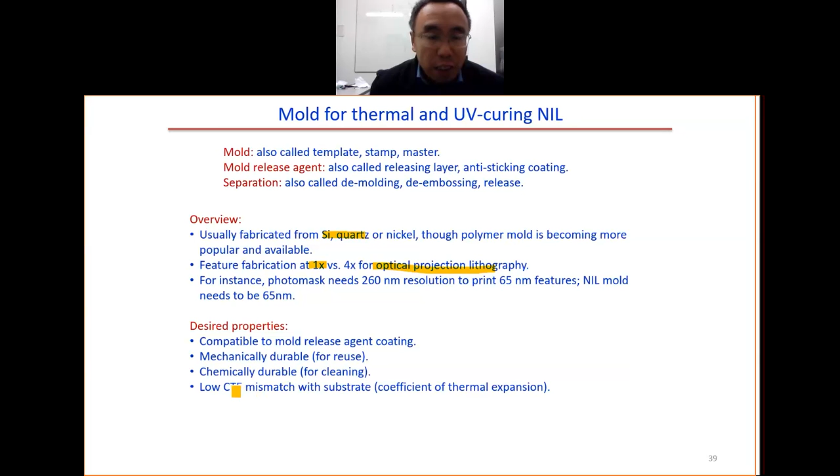So the properties we need for the mold: first, compatible with the mold release agent coating. This one is actually very critical because many materials, even though they have good mechanical or chemical properties, are not compatible with the mold release agent coating. Then we need mechanically durable, chemically durable, and low coefficient of thermal expansion mismatch.

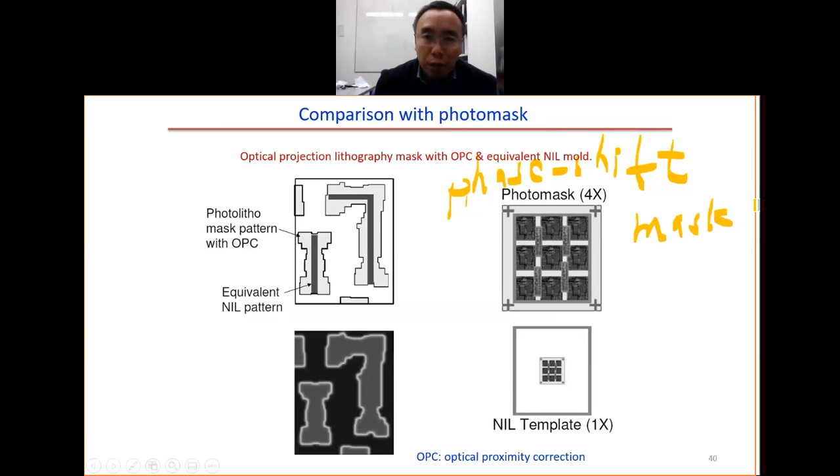As we can see here, for optical lithography, because of diffraction, we need to do many tricks to improve the resolution. Here we have optical proximity correction. Another thing we work on the most is the phase shift mask. So we also do the phase shift mask for optical lithography. For the imprint, we don't need optical proximity correction or phase shift mask. All we need is to make a mold with very high resolution patterning.

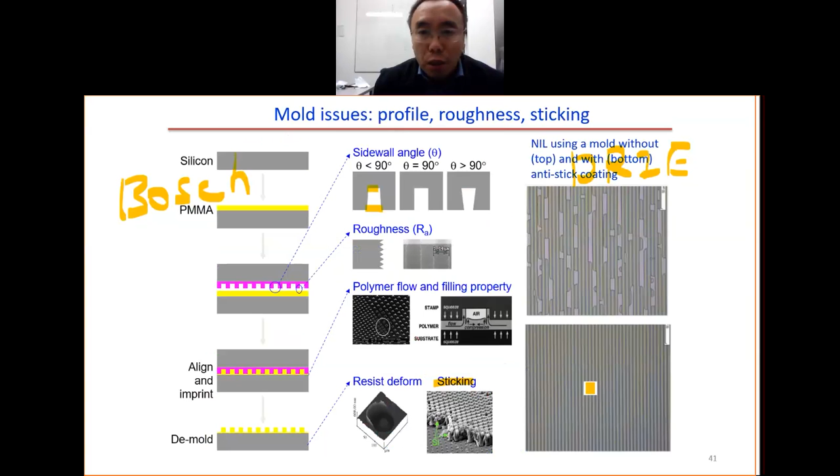So how to do this anti-sticking coating? Actually, this is the major secret of imprint lithography. In 1995, Professor Stephen Chou's group from University of Minnesota asked a student to spend about 1 year to find how to make the mold very low surface energy. But he wanted to keep the secret. When he published the paper in Science, he mentioned clearly that we do not need any mold release agent. But actually, this is wrong information. The only purpose is to mislead people. As a result, other people could not duplicate the imprint for maybe 2 or 3 years. Then they realized you need some anti-sticking coating on the mold surface to make it actually work.

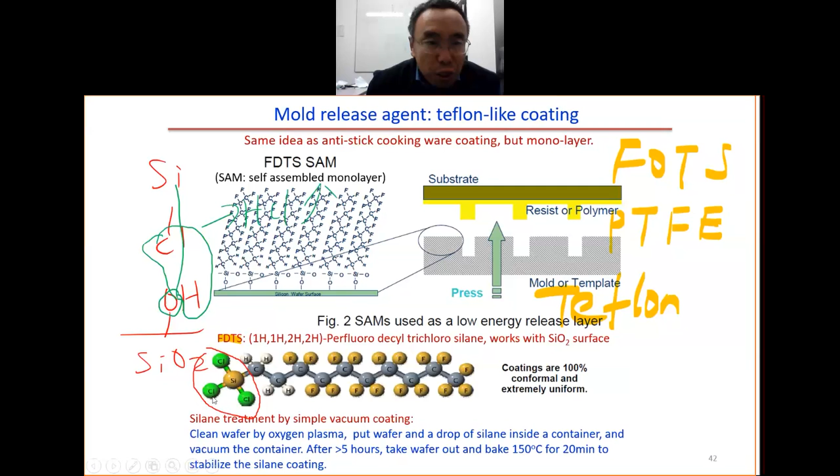But here you also see that you have the lateral bond, silicon-oxygen lateral bonding. So how to have this lateral bonding? This is because you have three chlorines, trichloro. So how does this thing work? It's like this. We have one silicon here, chlorine. You have another nearby one, silicon here, chlorine.

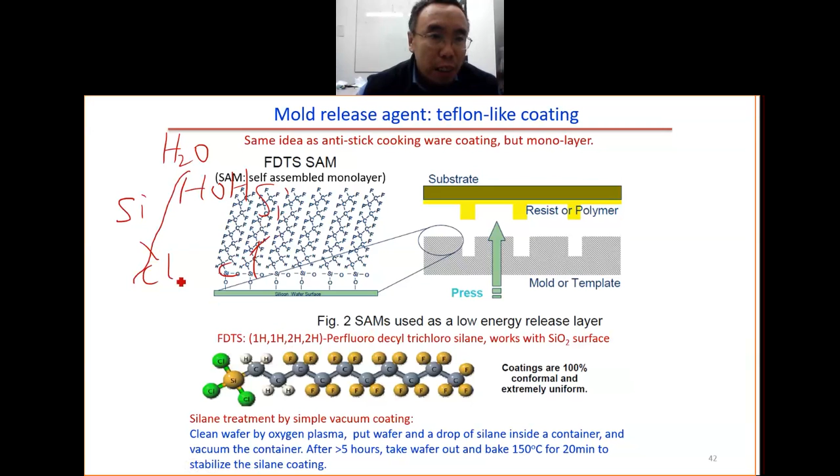In the environment, there is always water. Water, we know, is HOH. So effectively, this H will take away this chlorine to form HCl. This H will take away this chlorine to form another HCl. So in the end, you leave behind this oxygen here, and you have this silicon-oxygen-silicon that you can see here. So effectively, you form two HCl molecules to take away the chlorine. Then you have the oxygen bond.

So normally you clean the wafer. Then you put a drop of the silane. This silane is a liquid. You put a tiny drop, maybe a microliter, inside the container and pump vacuum on the container. After several hours, you take it out, you do the baking, you get a very good coating property, and you make the surface very hydrophobic.

Some of you may know we have this nanorobotics group at the University of Waterloo. The task for the nanorobotics group is to move micro objects as fast as possible and pass the barriers. When you want to move the nano or micro object very fast, you need the surface to have very low surface energy, very low friction force.

The people came to me, maybe this happened 7 years ago, and asked me how to make the surface very low friction. I told them to do this kind of process. Later on, they won the first prize in the nanorobotics competition in the world. This is the most important secret for nanoimprint lithography. But nowadays, everybody who works on nanoimprint knows about this coating to make the surface very low surface energy.

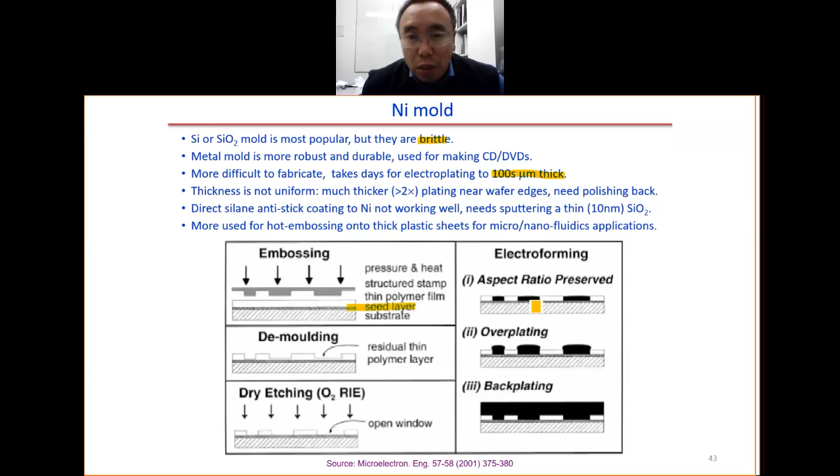Then you do the electroplating, you overplate to build up the backbone, which is hundreds of micrometers thick. This takes a day or maybe even longer to do the plating process.

Another problem is that the edge plates faster than the central part. You can imagine when more ions come to the wafer edge than to the wafer center, the growth there will be faster than the growth at the wafer center. So you need a polish-back process.

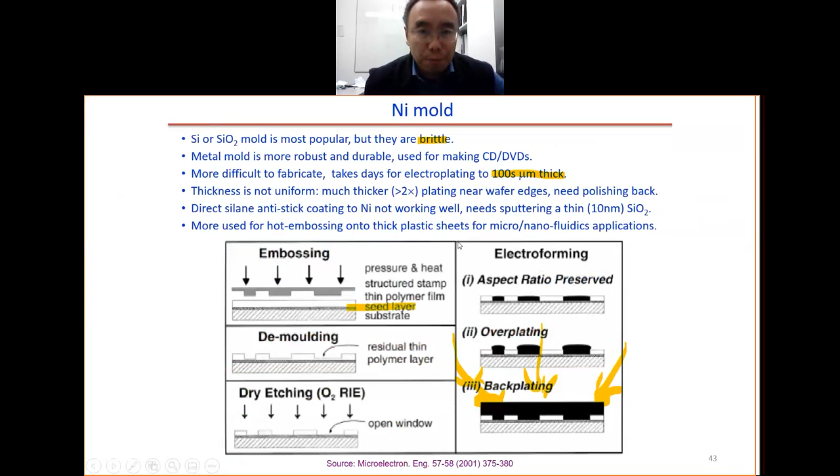Another problem is that nickel is not very good for anti-sticking coating. So what you can do is coat a layer of silicon dioxide, then you can process it to make the surface low surface energy. And this is the nickel mold.

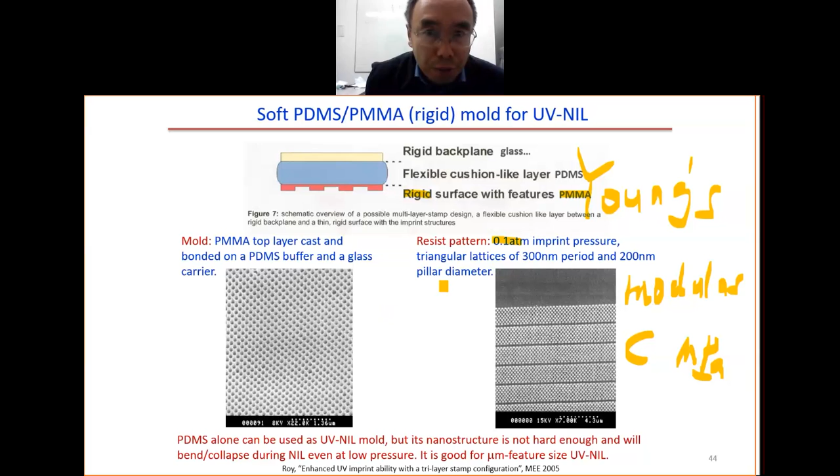...the PMMA is not compatible with this process. You cannot make the surface low surface energy. As a result, maybe after one or two imprints, the mold will have lots of peel off. This one in that is not good, only good for maybe one or two time imprints, then there will be a peeling off problem because this one cannot be made low surface energy.

This one is good. You can have this anti-adhesion layer give you low surface energy. This one, the backbone is the PDMS, a soft plastic. Because it is plastic, you can do the imprint onto a curved surface. You can see here, you do the imprint on the optical fiber because the PDMS is flexible.

It's very, very flexible, soft. So how do you make this mold? First you coat the coupling agent and coat the imprint resist. This is the PDMS. You coat the coupling agent because the resist has low surface energy; with the coupling agent you get better adhesion of the resist onto the PDMS substrate.

Then you do the UV imprint. This layer here is the UV resist, the UV curable resist. You do the UV imprint, they separate, and you get the mold. So you can see, it's not difficult to copy the mold from this master mold onto this polymer mold.

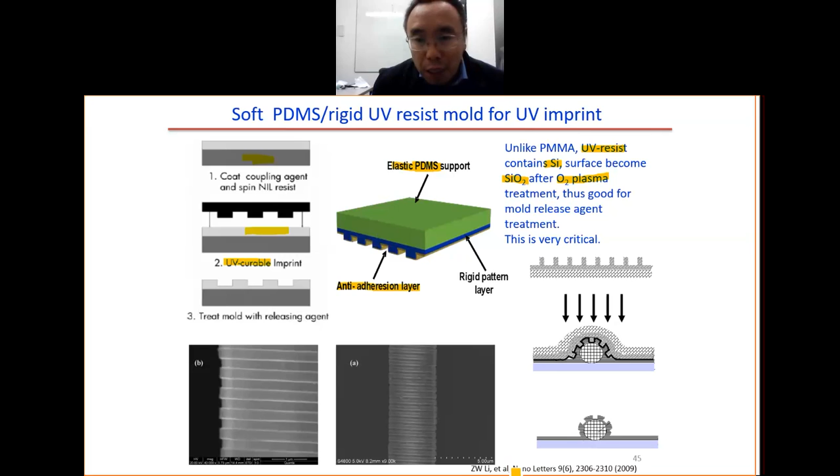So here the mold material, this one is the UV curing resist. We know that the UV resist contains silicon, lots of silicon inside. If we do oxygen plasma treatment, the surface becomes silicon oxide. When the surface becomes silicon oxide, you can process it to make it low surface energy for imprint. That's why this is a very good mold, published in Nano Letters, a very good journal.

So this is the fluoropolymer mold. We know that saving the master mold is very difficult and expensive to make. So to save the master mold, we can copy it into a polymer mold, then use the polymer mold to do the imprint. The good polymer is the fluorocarbon polymer, good because it has very low surface energy, for easy separation.

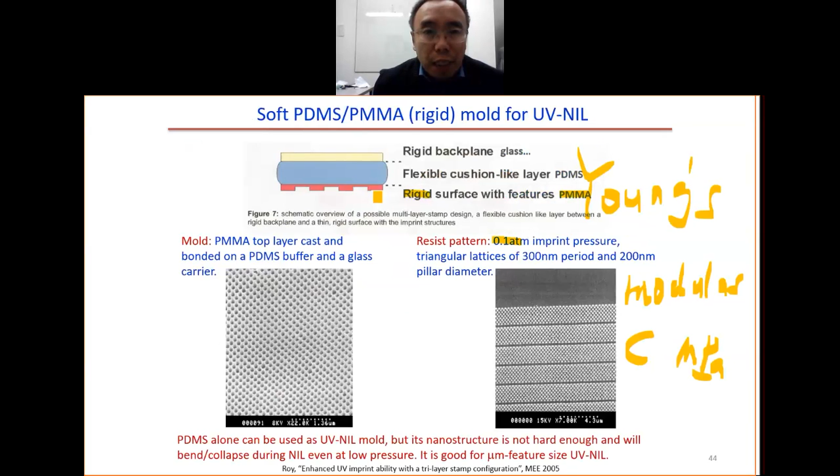So ideally, we want the mold to have low surface energy, then we don't need this self-assembled monolayer. This way we can use the mold hundreds or even thousands of times. So this is the idea: we have the mold in fluoropolymer. It is fluoropolymer, so this gives you low surface energy.

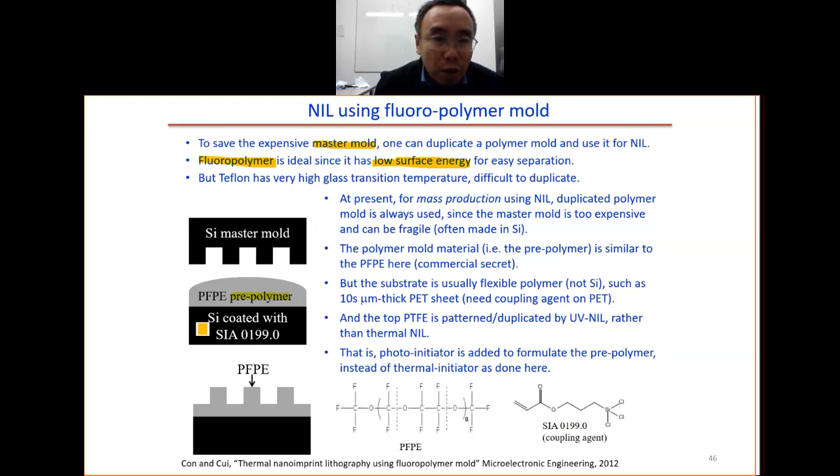We need this coupling agent. With this coupling agent, adhesion of the pre-polymer to the substrate will be better. Then you press the mold onto it, then do a thermal process, annealing at high temperature, and it becomes annealed and solidified. Then you get the mold.

But this is what was published in this work. So at the present, I learned recently that at the present, actually for mass production...

using imprint, this kind of polymer is actually used for the polymer mold, but this kind of thing is not published. People don't publish so much. But I will talk to people from the company, they can tell you this kind of information.

But the substrate here, in this work, is silicon. For mass production, we don't want silicon. So instead it is a PET sheet, a 10 micrometer PET sheet, rather than the fragile silicon.

Another difference is that this layer here, in this case, is cured by high temperature. But for production of the polymer mold from the master mold, it is cured by UV imprint lithography, not by thermal lithography. That means the photoinitiator is added to this material rather than a thermal initiator.

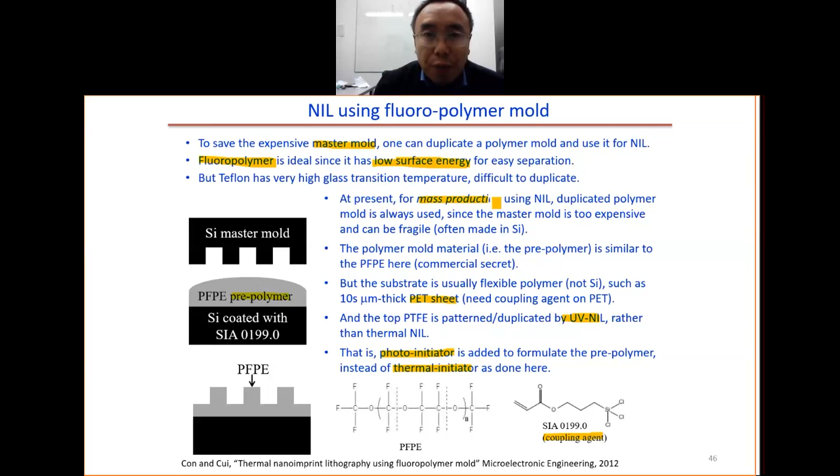So for this work here, we added the thermal initiator into this material. But for the UV imprint to copy the mold, we use the photoinitiator mixed with this material. Then you can cure the mold by UV light. Again, this is for mass production, a very, very important process.

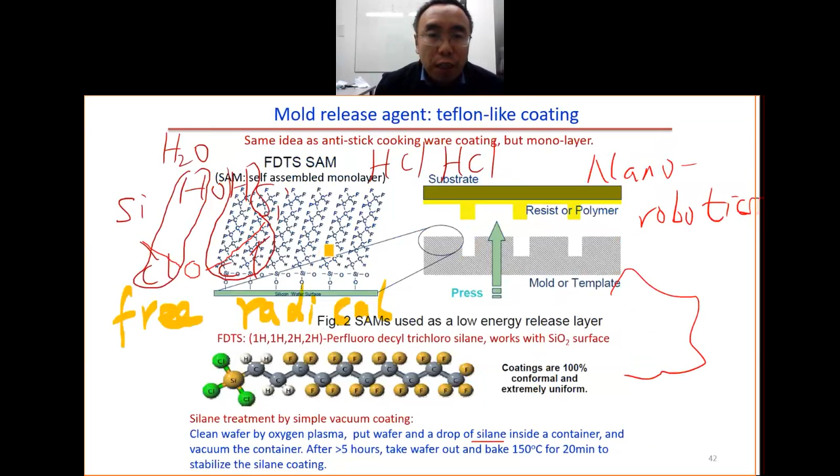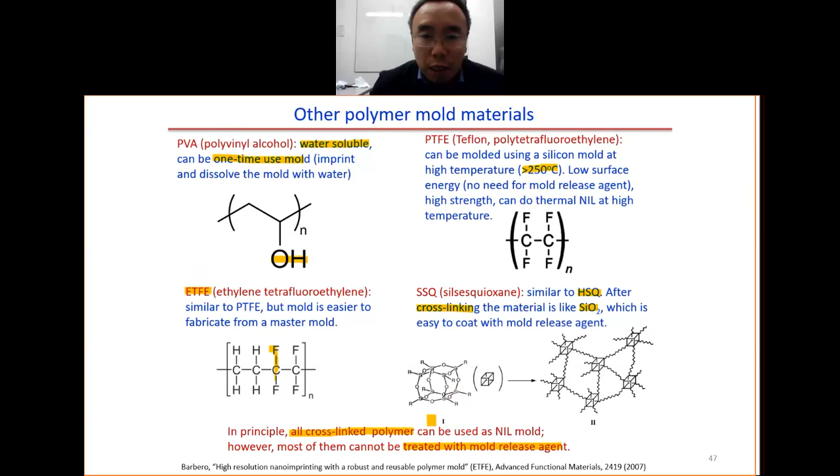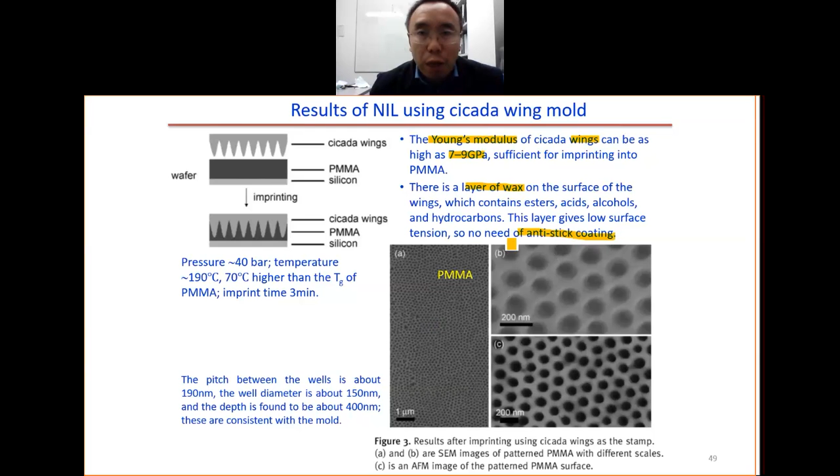More importantly, there is a layer of wax on the wing, and the wax has low surface energy, so it's easy for separation. That means the wing naturally has an anti-sticking property. So we have anti-sticking and low surface energy combined with the structure, giving super hydrophobicity, so water will fall off. This is good for the fly.

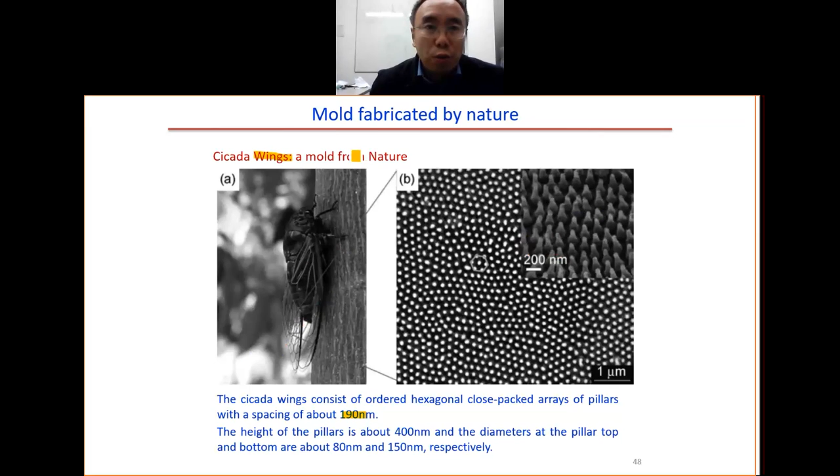Now let's look at alignment for imprint lithography. There is a big challenge for alignment in imprint lithography because first, we have a smaller error budget.

For the case of imprint, we have a 1 times error. That means if the misalignment is 10 nanometers, you get an error of 10 nanometers. But for optical lithography, you have 4 times reduction, so if the misalignment is 10 nanometers, it becomes 2.5 nanometers.

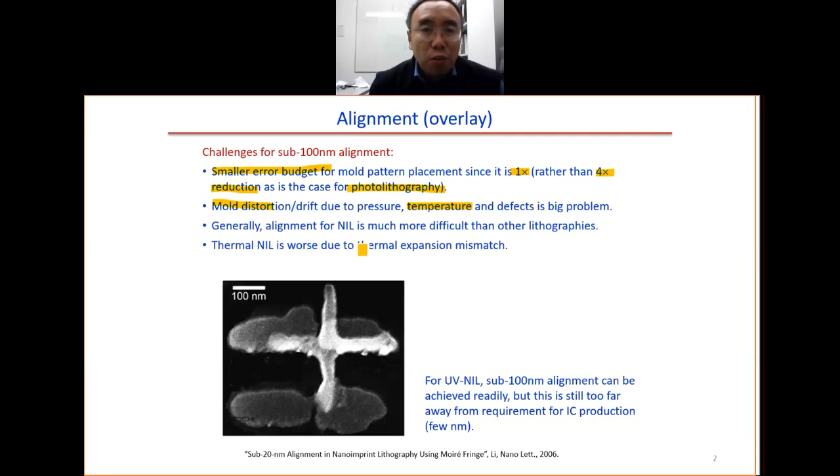The big problem for imprint is mold distortion and drift, because you need high pressure, and it's very hard to avoid drift, which damages the alignment. Also, temperature causes thermal expansion mismatch. For thermal imprint, it's very difficult because of this mismatch. For UV imprint, it's easier, but still very difficult because of the high pressure.

As a result, normally when we do imprint, we do not do alignment. We just do one layer, and it's done for the device. But in principle, you can do alignment, it's just not as easy.

In one example, we got 20 nanometer alignment by doing imprint, but in reality this is not so reliable. Sometimes if you have very bad luck, you don't get good alignment. So how do we do the alignment?

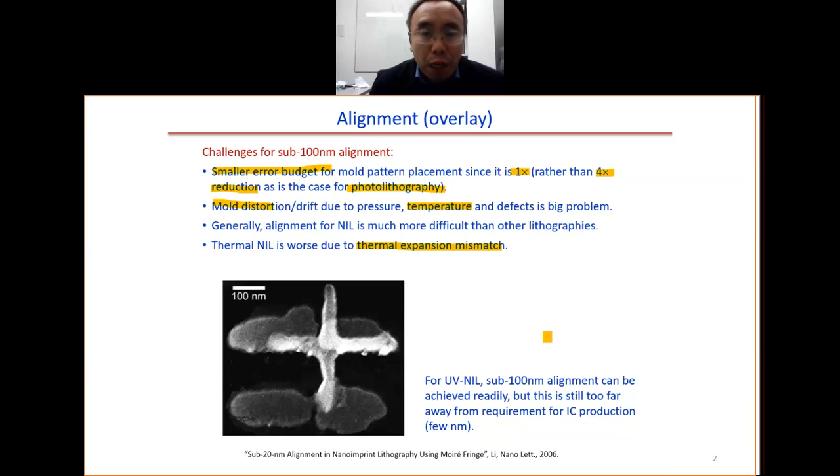One method, normally used in optical lithography, is called cross alignment. For this cross alignment, you have an alignment mark on the mold, and you put the complementary pattern - a square here, and the fourth square here with the other pattern. Then you measure them to get the alignment. This gives about half micrometer alignment accuracy, which is not good for nanoimprint.

For nanoimprint, we want alignment accuracy on the order of 100 nanometers. One way is to use gratings - you put a grating on the mold and a grating on the wafer with the same pitch, shine light, and do detection by transmitting light. We measure the zero order diffraction. When they are aligned like this, you get the maximum signal.

We can also do first order alignment. With first order diffraction, laser light comes in and you get one diffraction to the left, one to the right. You measure the difference between them. When they are symmetric, meaning well aligned, you get the minimum signal, ideally zero. That's one way to do alignment using gratings - the relative position of the two gratings tells you the misalignment.

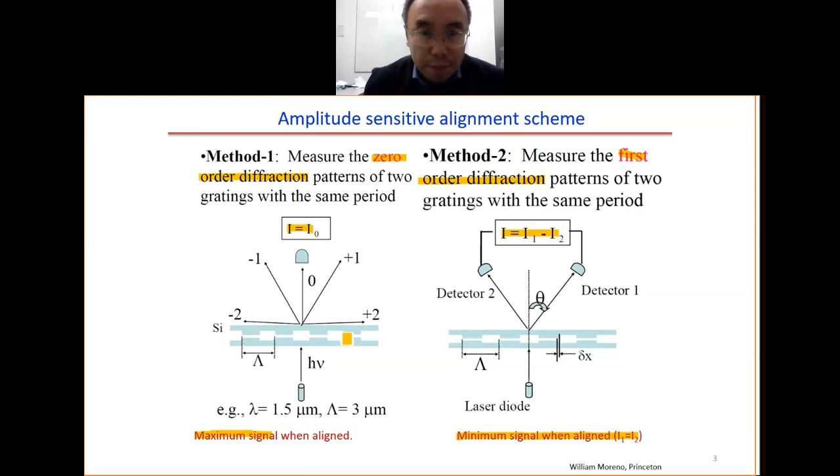Another method is called the Moiré pattern. This uses two periodic structures. When they are misaligned, you see a larger feature set appear - this is the Moiré pattern. We'll look at this more later. The strategy is to first do coarse alignment using the optical lithography method, then do fine alignment using this Moiré pattern.

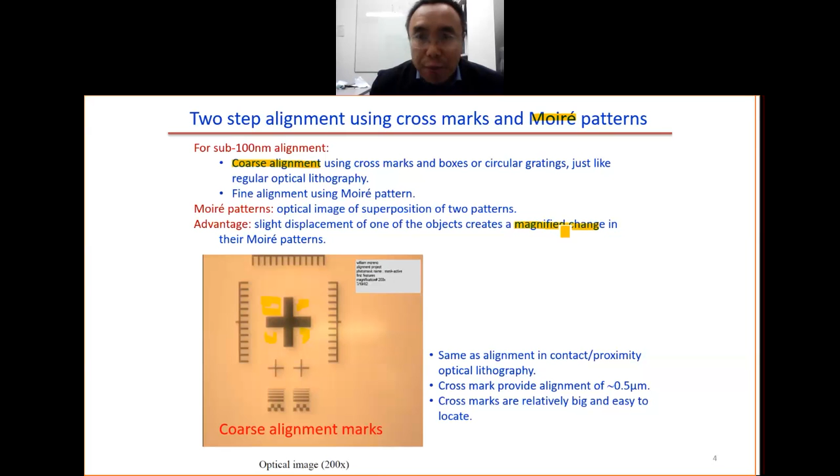Here is one example. You have this concentric ring with the pitch P1. You have the same thing, with the same pitch, also P1. You put them together. This one is aligned. When they are aligned, you see this pattern. When they are misaligned, you see something like that. So with a small misalignment, you can see this thing will show up. Effectively, the misalignment is magnified by this Moiré pattern.

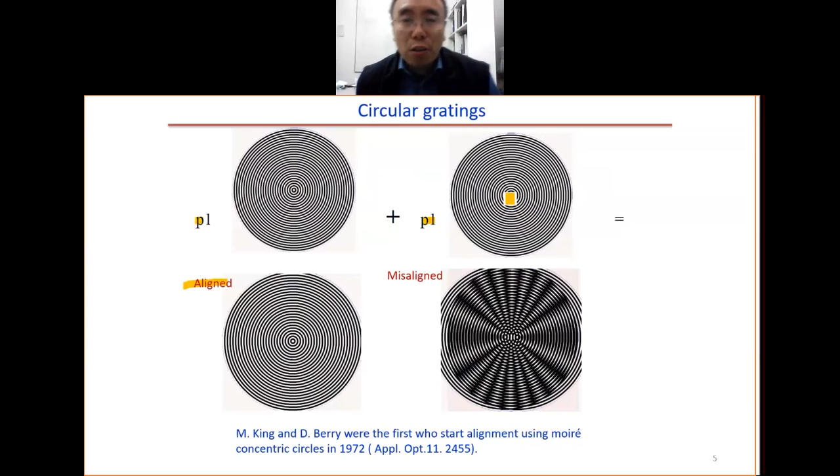If you look at the pattern here from a different angle, you see something like a wheel rotating. This is because the screen has pixels, so the pixels can also form a Moiré pattern with this periodic ring structure.

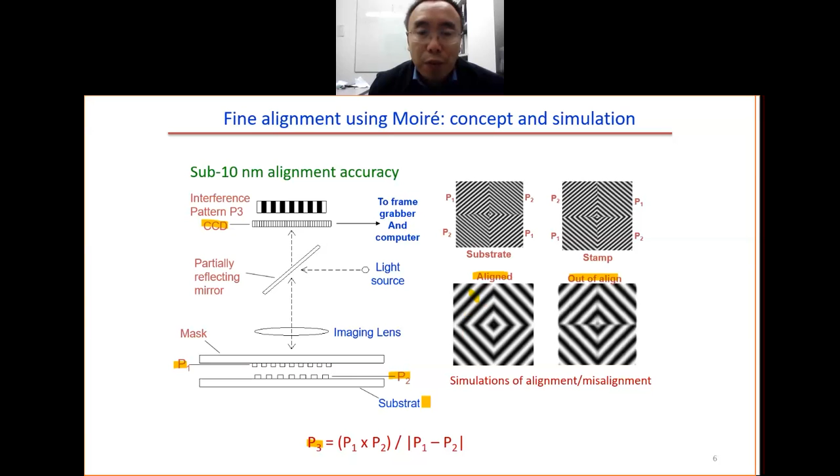So here is another design. This is the pattern on the mask, and this is the pattern on the substrate. You flip the mold over, so P2 will come to P1, and P1 will overlap with P2. Then you get something like this. When they are aligned, you see something like this. When they are not aligned, you see something like this.

Again, the pitch here, P3, is from here to here. This distance, P3, is given by this formula: P1 multiplied by P2 divided by P1 minus P2.

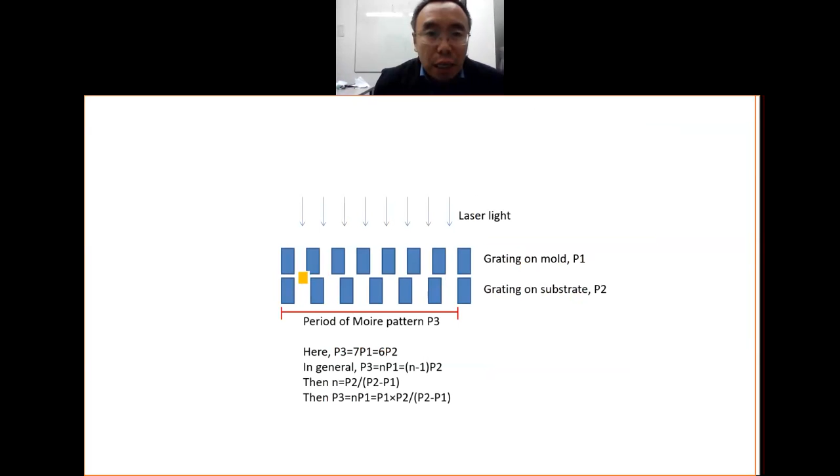Now let's look at how to derive this formula. Here we have the dark and the bright. Where is the dark? Where is the bright? In this case, we have a grating on the mold and a grating on the substrate. When you have this kind of alignment, the light can pass through, so this is the bright. When you have this kind of alignment, the light will be blocked, so this is the dark. This part corresponds to the dark, and this part corresponds to the bright.

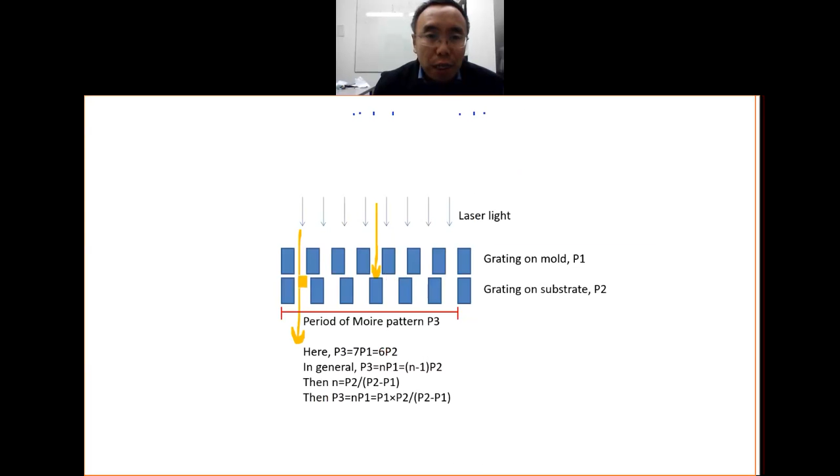So the pitch is from here to here. This is the P3. As you can see, in this case, P3 equals 7 times P1, which equals 6 times P2. We have 1, 2, 3, 4, 5, 6, 7. So we have 7 times P1 and 6 times P2.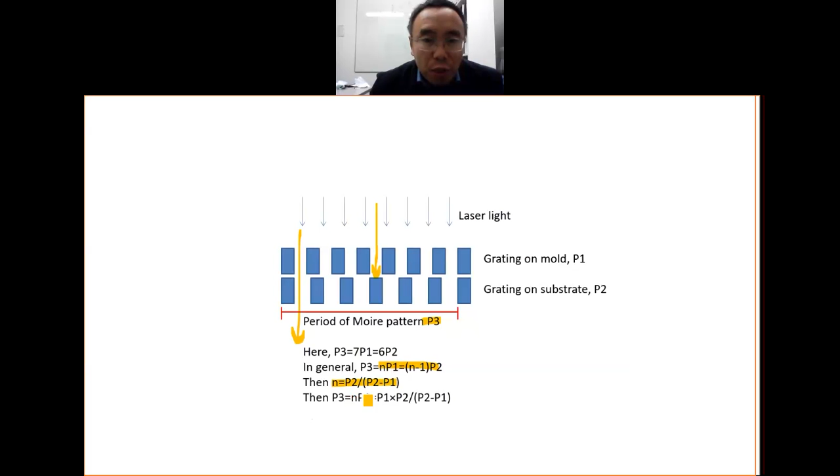In general, P3 is given by n times P1 and also n minus 1 times P2. From these two, we get n equal to this value. You put this n into here, so P3 equals nP1, and you get this. This is the formula you get, the same one as this one, and also the same as this one. So this is how you do the alignment.

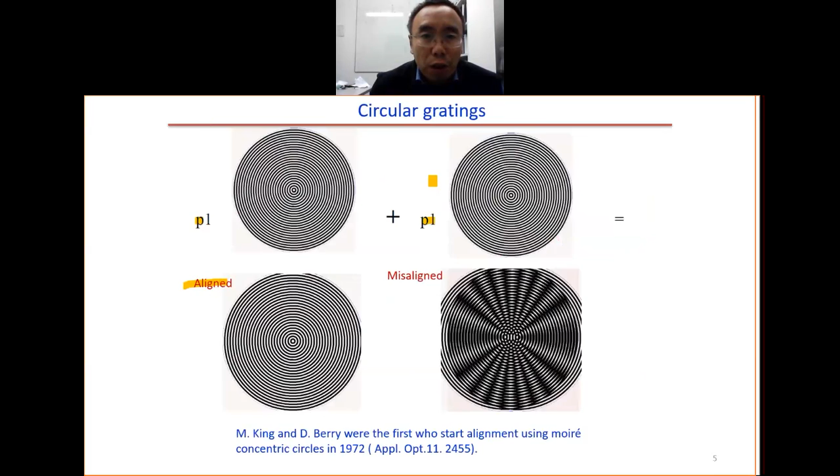Now I will show you a video for this Moiré pattern. It is a fun video. For the Moiré pattern, as I said, you have two periodic patterns that do not have the same period. When they overlap, you see a magnified pattern.

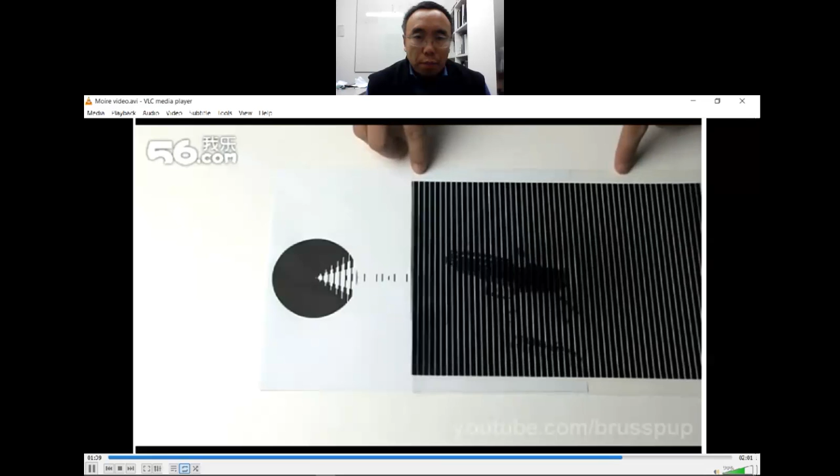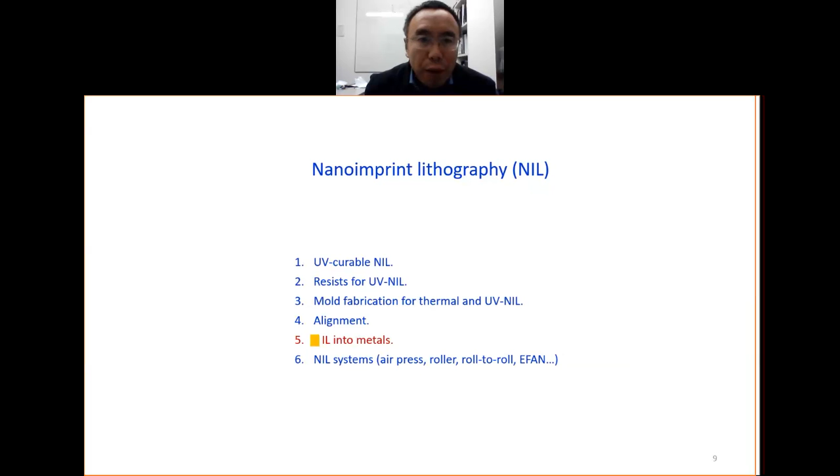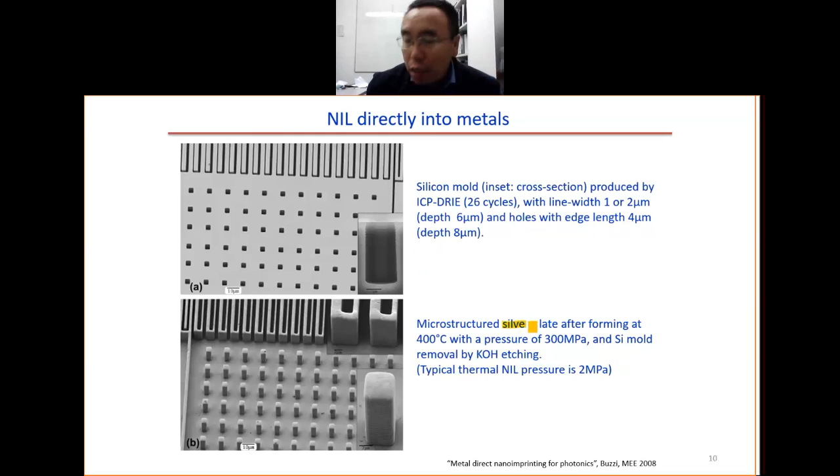So now we look at imprint into metals. In this first example, we do the imprint into silver. Silver has a melting temperature of about 962 degrees. But here the imprint is done at a lower temperature, 400 degrees, and the pressure is very high. They use 300 megapascal pressure. Normally when we do thermal imprint, we only need 2 megapascal.

So here it's moderate temperature and very high pressure. This is the mold, a silicon mold made using deep RIE. With this deep RIE, again, you see the wavy structures, so this uses the Bosch process.

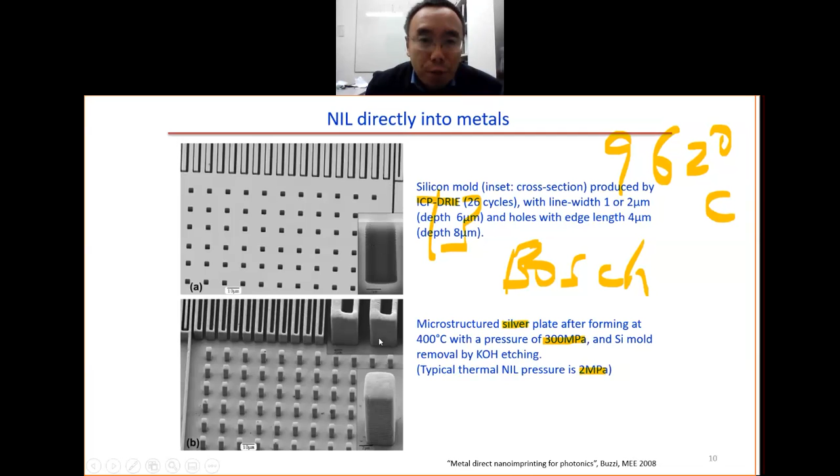Use the Bosch process to make this mold. Because the sidewall is rough, and also we have this negative taper angle, the separation will be very difficult. In this case, the mold is not separated from the silver. It is actually dissolved. The mold is dissolved by the KOH etching. This way you get the silver pattern in the end.

This is the demonstration to show that it is possible to do the imprint into the metal, but either you need very high temperature or you need very high pressure. So that is not easy.

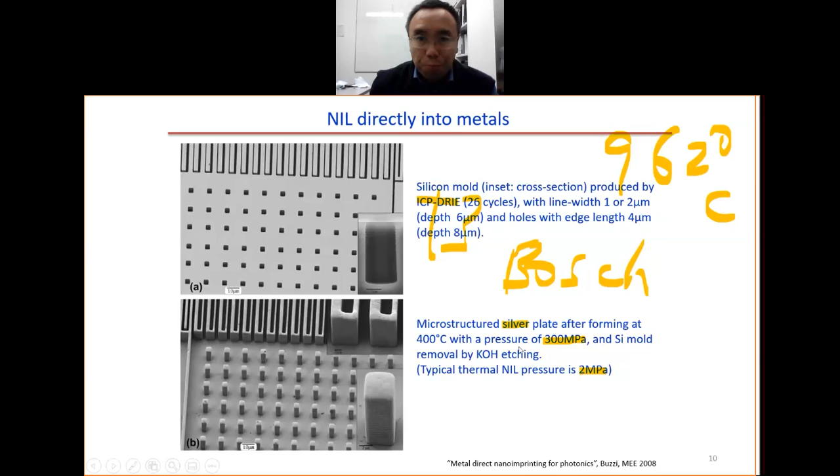But we cannot do imprint. In principle, we cannot do imprint at 150 degrees, because if we do the imprint at 150 degrees, the particles get merged together. But once they get merged together to form the film, the melting point goes up right away. So it no longer melts. So what can we do? We could dissolve the nanoparticles into a solvent.

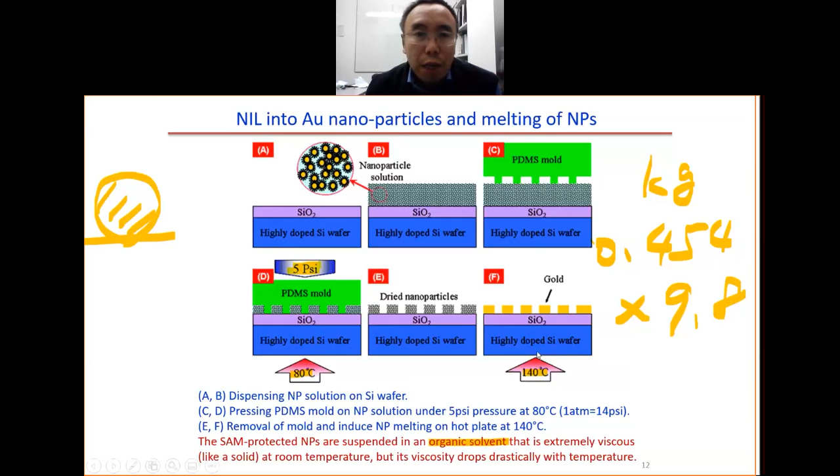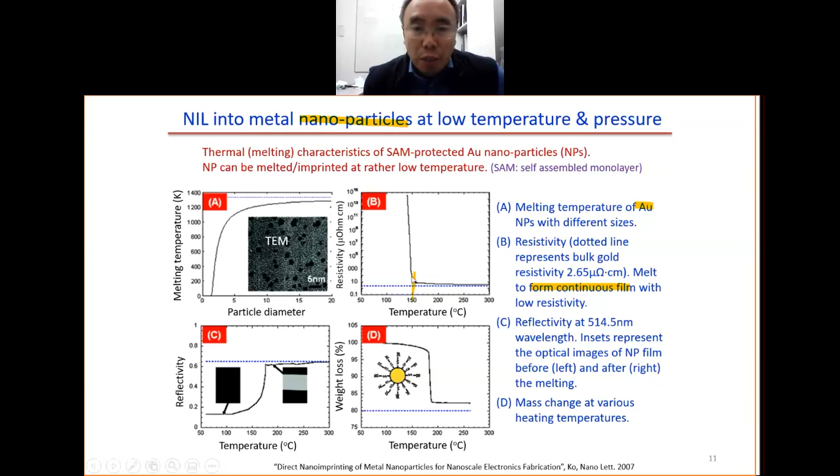We have the nanoparticle, it got melted. But once they got melted, they come together, you get this big gold. It's no longer nanoparticle, so the melting temperature goes up right away. That means the melting point here is 140 degrees, but once it got merged together, the melting temperature becomes more than a thousand degrees. That's why I said you cannot do imprint into the gold at 150 degrees, because once they got merged, the melting point goes up right away. It no longer flows.

In this example here, we can do the imprint into the metal using the laser pulse. We know that it's hard to melt the metal, you need a thousand degrees, but it can be easily melted by using the laser pulse. The example here shows the imprint into bulk silicon. This is not metal yet, it's silicon. But we can do the same thing on the metal.

Here you can see, first we press the mold onto the silicon substrate. Then we shine the pulsed laser light, so the top layer will get melted momentarily, for nanoseconds. The top layer got melted. Then the mold sinks into the substrate. Then cool down, you separate, you get the pattern. This way, you can pattern the silicon in one shot. This happens within only 100 nanoseconds.

This paper is published in Nature in 2002. You may wonder what's the importance of this. Normally, when we make the structure in silicon, we need to do lithography. We need to pattern the resist by lithography, we do the pattern transfer, then we remove the resist. We need these 3 steps to do the pattern transfer to the silicon.

But here, we only do 1 step. Just shine the laser, and you pattern the silicon right away. And this is done within 100 nanoseconds. So this looks very good. That's why it's published in Nature in 2002. At the beginning, people thought this was really important, so maybe you can pattern silicon for IC manufacturing.

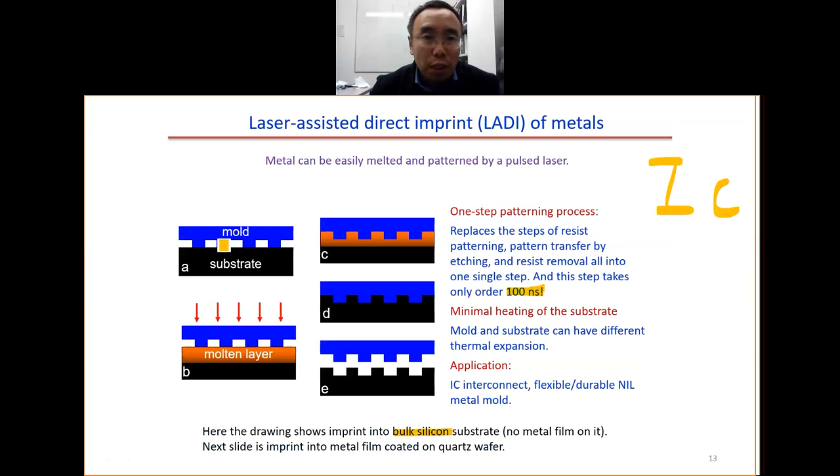So we can do a similar process using metal. The idea is simple. You coat the metal film on top of the quartz substrate, then you do the same process. The metal can be melted by the laser pulse. Here in this case, we use the xenon chloride laser. This is the excimer laser.

By now, you should be very familiar with the excimer laser, because for lithography, 193 nanometer is the argon fluoride excimer laser used for IC manufacturing. For xenon chloride, you get 308 nanometer. The pulse duration is 20 nanoseconds. This energy, 0.24 joule per centimeter square, looks like a very low number, but it is only 20 nanoseconds.

So you divide this number by this number, and you get 12 megawatt power. This is very high power. That's why the top surface gets melted. Then you get the metal grating structures. But here the surface becomes rounded because of the shrinkage upon solidification of the molten metal.

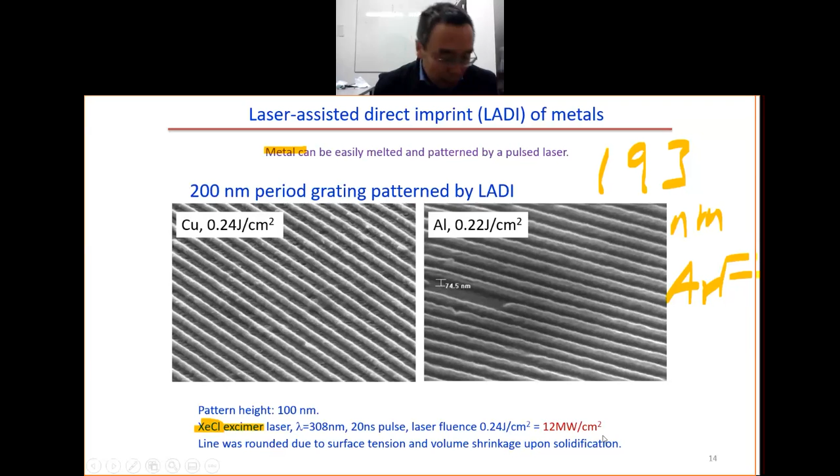So now let's look at how much pressure we need to do the imprint. We have seen this example before. The pressure is given by 2 gamma over R. This is when we have a hole in the mold. Now here we have a trench in the mold.

So the pressure can also be calculated. Here is the force, the surface tension force, 2 times, left and right. We have 2 times gamma L divided by the area. The area is W times L. Then you get the pressure 2 gamma over W.

So what happens when the liquid has already touched the bottom? How do we calculate the pressure needed to touch the bottom, with the gap here being R? This is not so straightforward, but it's not hard to understand. So what do you do? First, you consider this volume of the liquid.

Then we consider the force along this direction. So what force do you have here? The drawing is not so good; this one should be parallel and overlap with the dashed line. So you have this force here, gamma L, and another one here, gamma L.

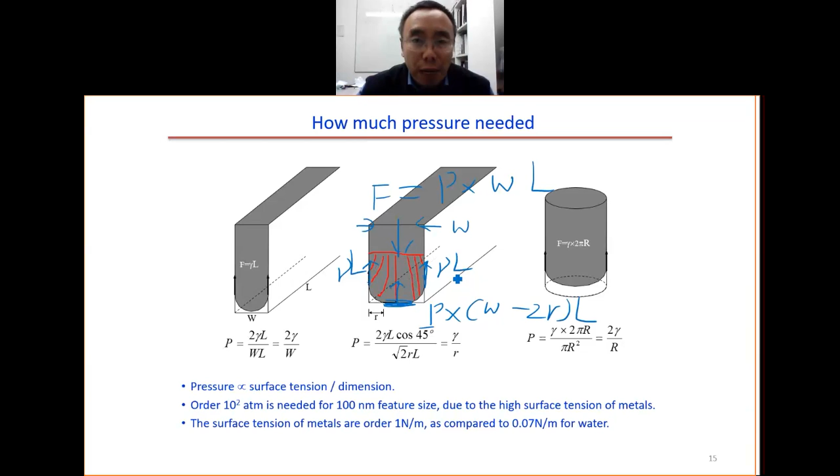So the contact area here is equal to W minus 2R, right? This is the W here. We have one R on the left, one on the right. W minus 2R times L. So the four forces here: this one downward, this one upward, this one upward, this one also upward. This should be a balance. That means PWL equals 2 gamma L plus P(W minus 2R)L, right? This is what you get.

So we can do some simplification. PWL is cancelled out with PWL. So in the end we move this part to the left, and we have P times 2RL equal to 2 gamma L. Then you get the pressure here, again given by gamma over R. You can see it's not so hard. So what do we do? We consider this volume of the liquid, then we do the force balance.

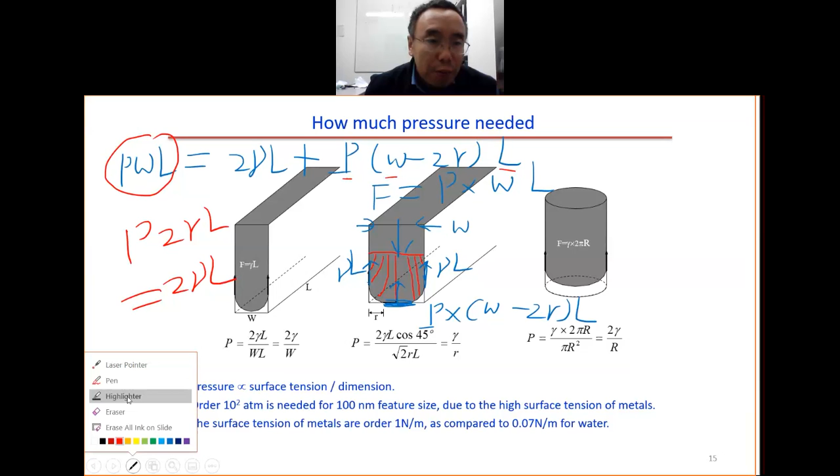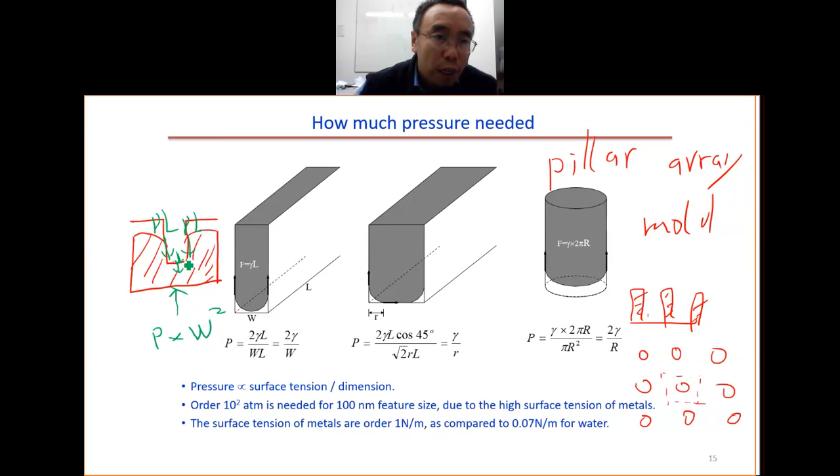From the bottom, we have P times, say, W squared. So P W squared is the force from the bottom. From the top we have this force here, given by P times the area. If this is a circular shape, we have pi r squared. So in the end, the force by the pillar top is given by gamma L equal to P times W squared. W is the period, this area here. Again, this way we can get the pressure.

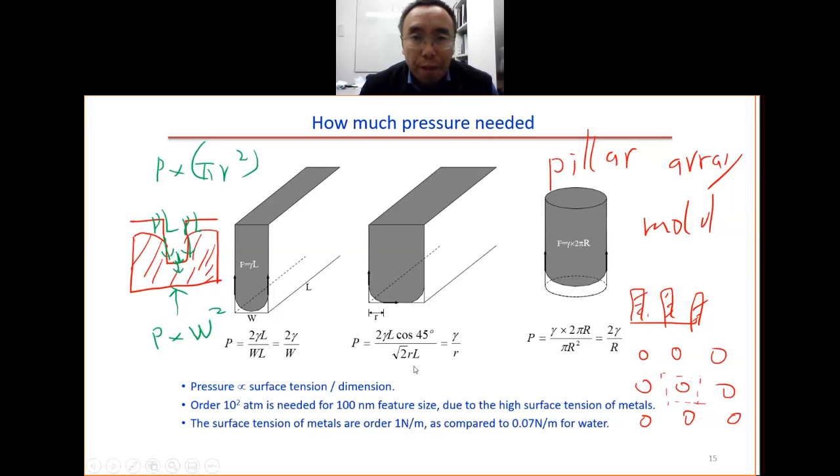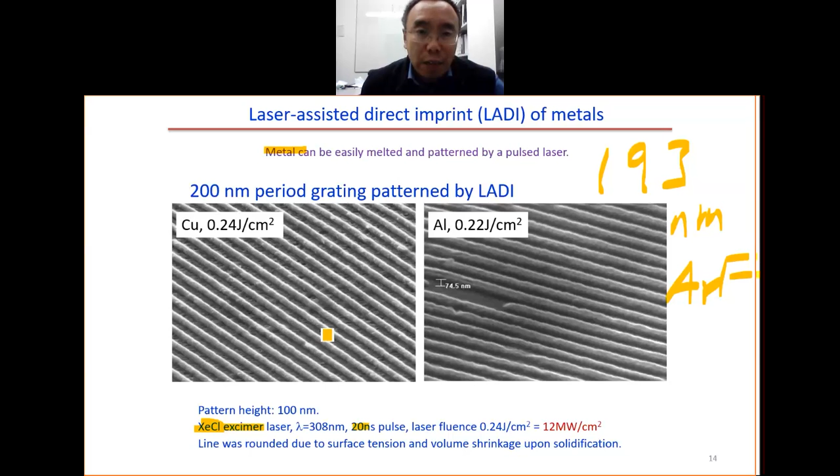The film thickness is 200 nanometers. Then we need to know the viscosity. The viscosity of molten metals is similar to that of water. For water it is 0.00091 pascal second, so the viscosity for the metal is in a similar range. So we put everything together and we get this number.

For silicon, this formula theoretically predicts we can get a 12 micrometer feature size. In reality, 17 micrometer silicon can be patterned, but if you have 10 micrometer, the 100 nanosecond time will be too short, so this will not work.